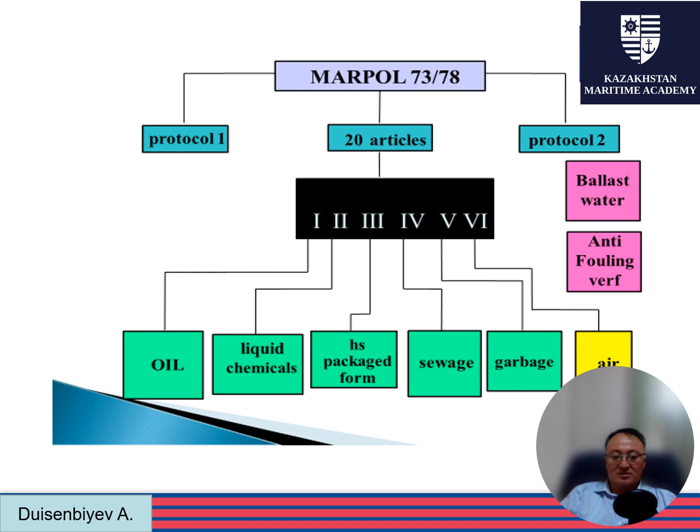This is a reminder of the structure of the Marpol Convention, where you can find 6 annexes: oil pollution prevention, liquid chemicals, hazardous substances packaged in packaged form, sewage pollution, garbage pollution, and finally the currently last annex of Marpol, which is air pollution prevention.

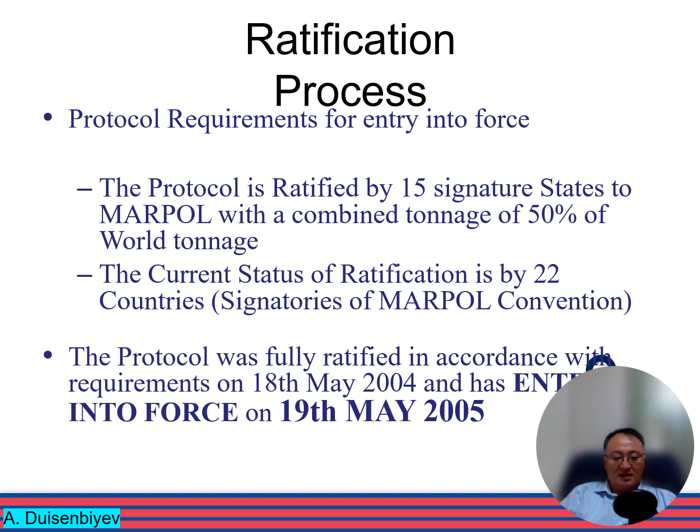The protocol of Marpol Annex VI entered into force in May 2005. It took a lot of discussions, several years to come to this annex, but finally on the 19th of May 2005 the protocol entered into force. Flag states party to the protocol.

There are enough countries with enough world maritime vessel tonnage. When these 22 countries signed for this protocol, it entered into force.

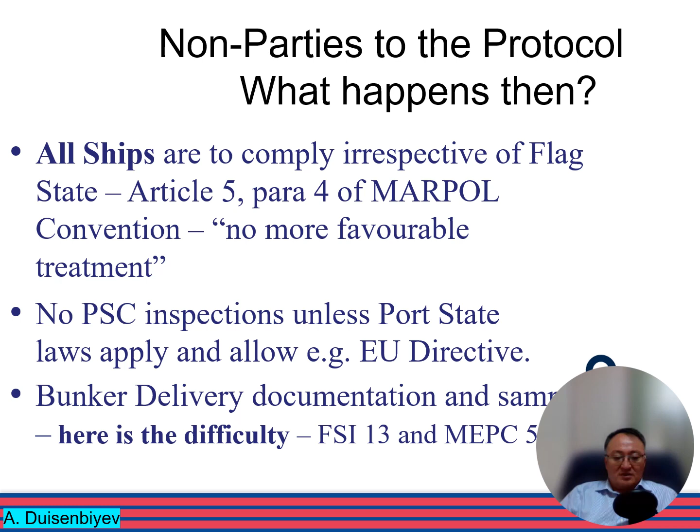Why do we need to take care about air pollution prevention? Because the effect of the world maritime industry became important to prevent air pollution. Emission gases from ships include several different types.

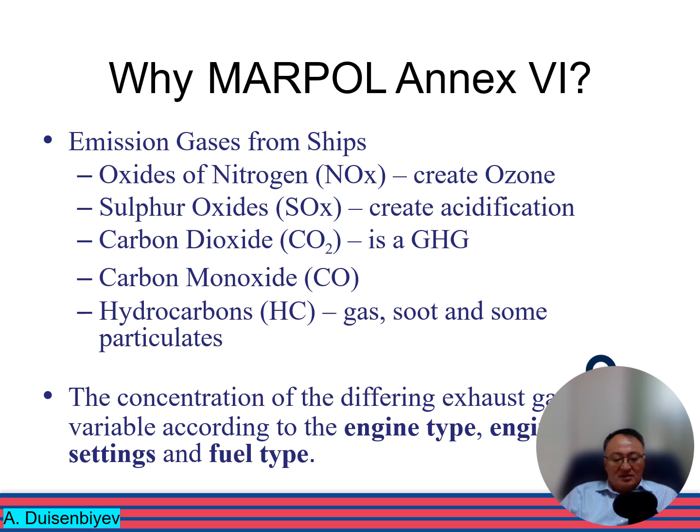Oxides of nitrogen create ozone depletion in the air. Sulfur oxides create acidification. Carbon dioxide is a greenhouse gas. There's also carbon monoxide, hydrocarbons, gas, soot, and some particulates. The concentration of the different exhaust gases is variable according to the engine type, engine settings, and fuel type.

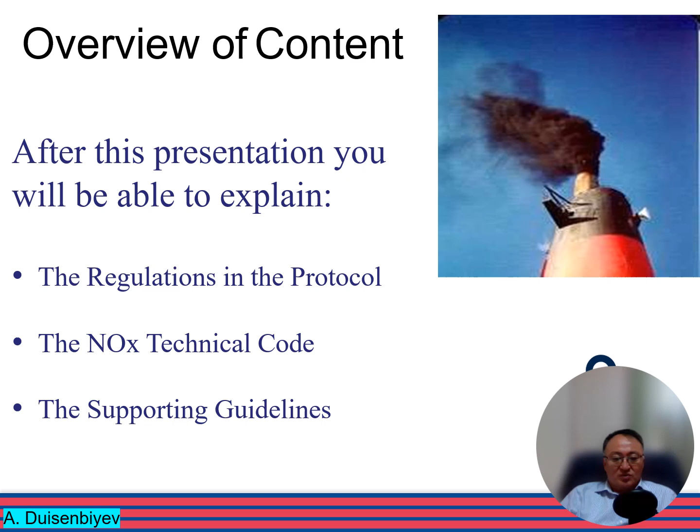So we are producing these black smokes. After this presentation, you will be able to explain the regulations of this protocol, the NOx technical code, the supporting guidelines, and how it is important to keep our air clear.

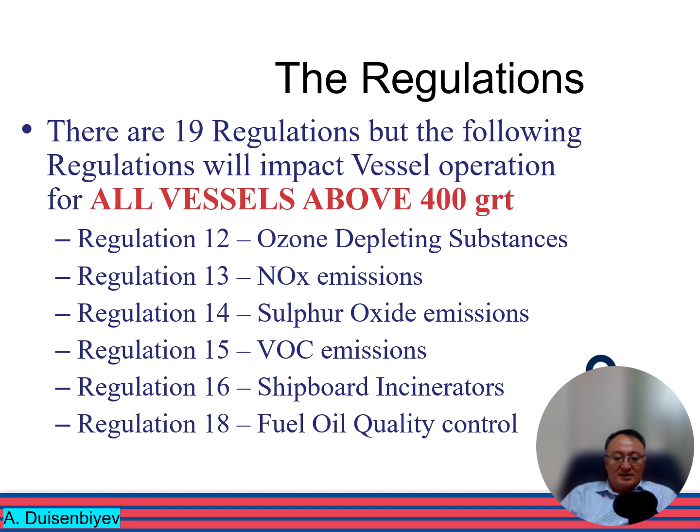There are 19 regulations, but regulations 12 to 18 are very important in accordance with the application to all vessels above 400 gross tonnage.

Ozone depleting substances, ODS - deliberate emissions of ozone depleting substances are prohibited. New installations can only use HCFCs, hydrochlorofluorocarbons, until 2020. These substances, when removed from ships, must be delivered to reception facilities.

Where can you find these HFCs? Of course, our different home appliances can also produce it, like air conditioning systems, our fridges and so on. They are all using HFCs.

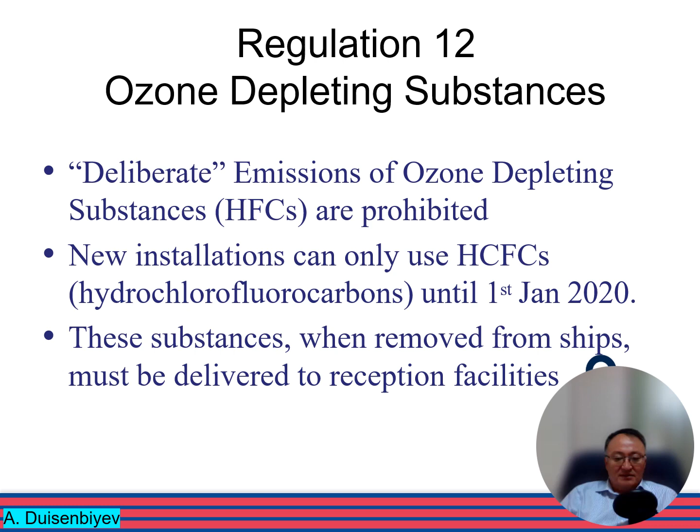For all engines except emergency engines, please pay attention. Emergency engines are used in safety boats, life-saving appliances, and so on, which are used in emergency conditions. For all engines installed on ships after 1st January 2000 of more than 130 kilowatts, they must comply with these regulations. This is very important that you have to know the system of application.

The NOx emission is limited to 17 grams per kilowatt hour for engines operating at 130 RPM, rotations per minute, but reducing to 9.8 grams per kilowatt for 2000 RPM.

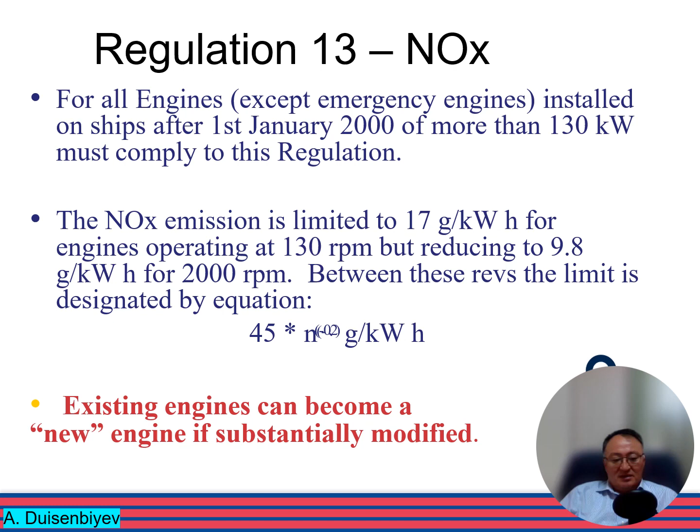Existing engines can become a new engine if substantially modified, for instance after some repair. Regulation 13 requirements are fully defined by the NOx technical code, which is recommended technical reading.

Certification of the engine is done at manufacture and checked on installation for settings. A certificate is required for ships under Annex VI - the Engine International Air Pollution Prevention Certificate and the International Air Pollution Prevention Certificate are required.

PSC inspection for the engine by the parameter check method - this is a technical method, and port state control officers are able to provide this check. The simplified measurement method is another option which the vessel can go through because of previous positive results.

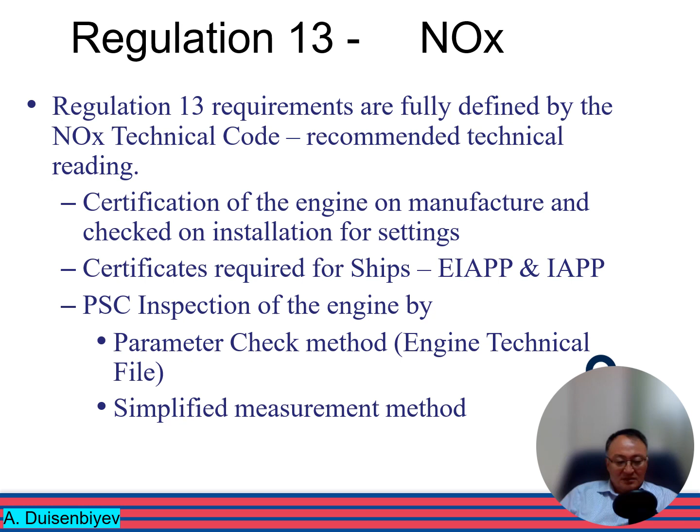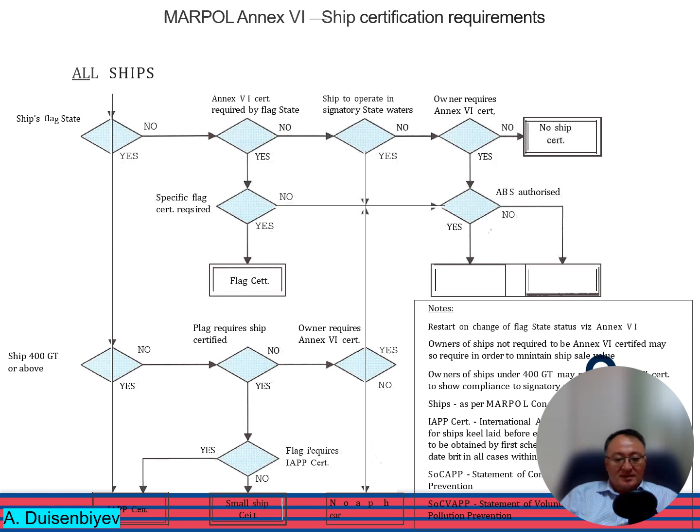Here you see the ship certification requirements - this is a logical scheme: yes, yes, no, yes, no, yes, no. So you can see the way the vessel can obtain the certificate, and in which case it can get no certification. Please try to stop on this table and understand the process of certification.

Regulation 14 is applicable to the prevention of sulfur oxide pollution. The worldwide sulfur cap on fuel oil is set at 4.5%. Sulfur Emission Control Area.

This is new stuff which is created by IMO in this Marpol Convention - these are SECA areas, Sulfur Emission Control Areas. Areas under this annex are the Baltic Sea, North Sea, and English Channel. Currently, we have these SECAs.

So sulfur level of fuel is 1.5%, or alternatively use an exhaust gas cleaning system. So what does it mean? The vessel which is entering English Channel, Baltic Sea or North Sea should switch from heavy fuel oil to marine diesel oil, from HFO to MDO, or it should prove that it has an exhaust gas cleaning system on board of the vessel.

Regulations for the first SECA came into force on the 19th of May 2006. So you need to understand and use this knowledge in the practical stuff.

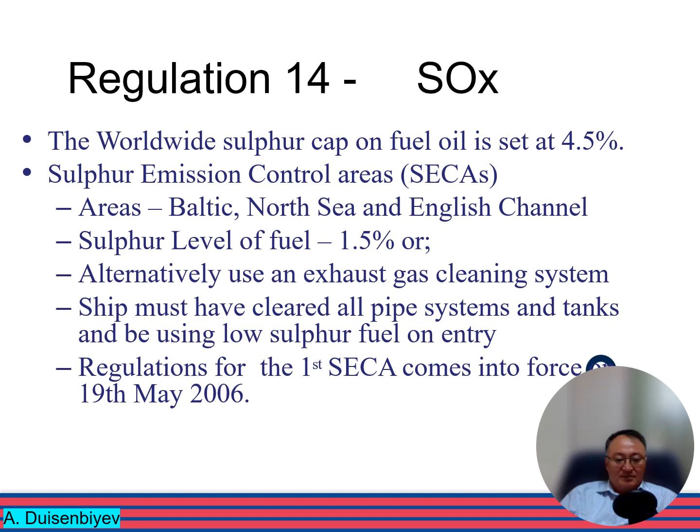Shipboard procedures for SECAs: we need to have a plan in advance for entry, and enter the commencement date of preparation in the logbook together with bunker type quantities on board. So logbook entry, when entry requirements are met, and entry into SECA - remember latitude and longitude, date and time, together with bunker figures for each tank.

How it looks in reality: you have to have a plan. The captain, the chief officer, chief engineer - they have to have a plan how they are planning to enter the SECA area. So they put the date and time in the logbook, and they put the latitude and longitude where they believe that they entered the SECA. And also they have to count the amount of oil they consume during being in the SECA area.

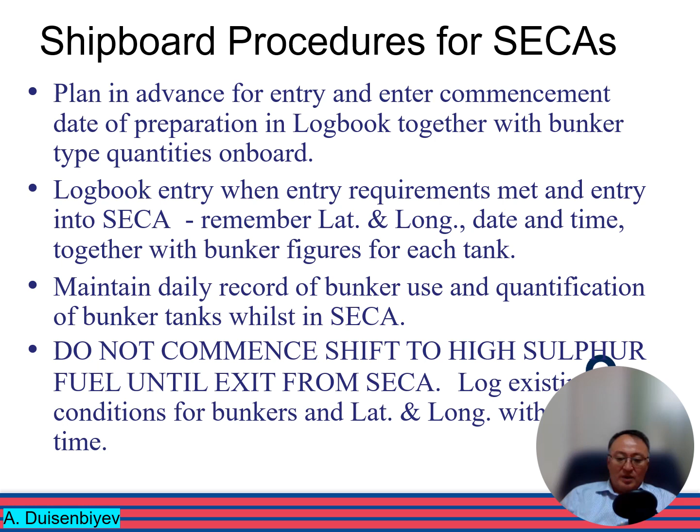So maintain daily record of bunker use and quantification of bunker tanks whilst in SECA. Do not commence shift to high sulfur fuel until exit from SECA. During all the time you are in the SECA area, you have to continue to use marine diesel oil. Log existing conditions for bunkers and latitude, longitude, with date and time when you get out from the SECA area.

So VOCs, volatile organic compounds. Subject to individual terminal regulations, tankers may have to be equipped with a vapor return manifold. Notification of VOC control by a port to the IMO shall be 6 months before enforcement. Tankers can accept... tankers up to 3 years after the date of VOC control enforcement by the terminal.

The standard for the design of VOC return, and operation, is contained in Maritime Safety Committee Circular 585. So vapor return manifold is some extra equipment which will prevent the volatile organic compounds emission to the air.

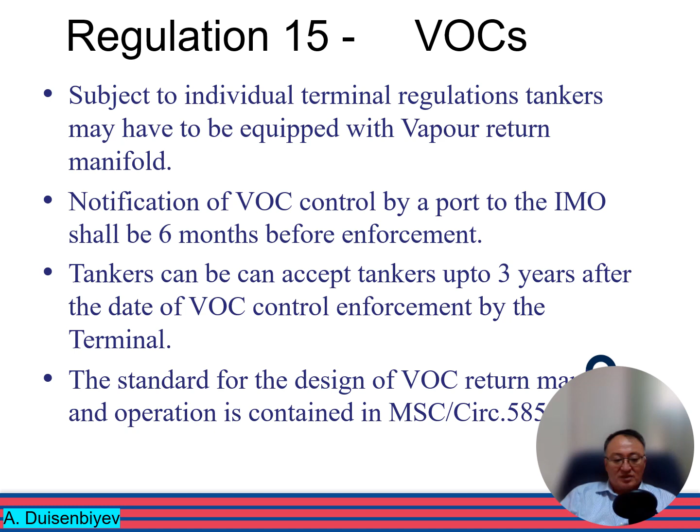Regulation 16, yes, it's related to the incinerator. Incinerators installed after 2000 must meet regulations and must certify to meet the specification of resolution MEPC 76, Appendix 4 of Annex 6. Each incinerator must have a manufacturer's operational manual. Crew responsible for incinerator operation shall be trained and follow the operation manual. So incinerators should be certified and they have to have a manufacturer's operation manual.

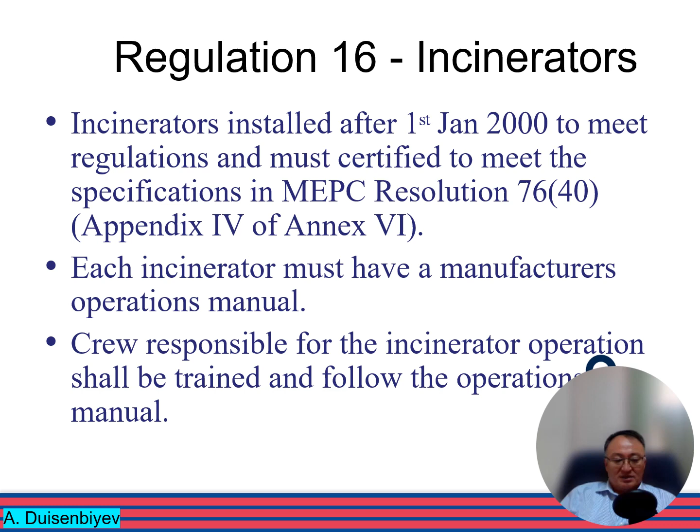So how to use an incinerator? The following substances are prohibited from incineration: stuff out of Annex 1, 2, and 3 cargo residues and related packing materials. What does it mean? No oil residues can be put in the incinerator.

Noxious substances, yes, some dangerous substances - so even the packages of these materials cannot be incinerated. PCB, this is plastic stuff. So garbage as defined by Annex 5 containing heavy metals in content. So petroleum products containing halogens are also prohibited from the incinerator.

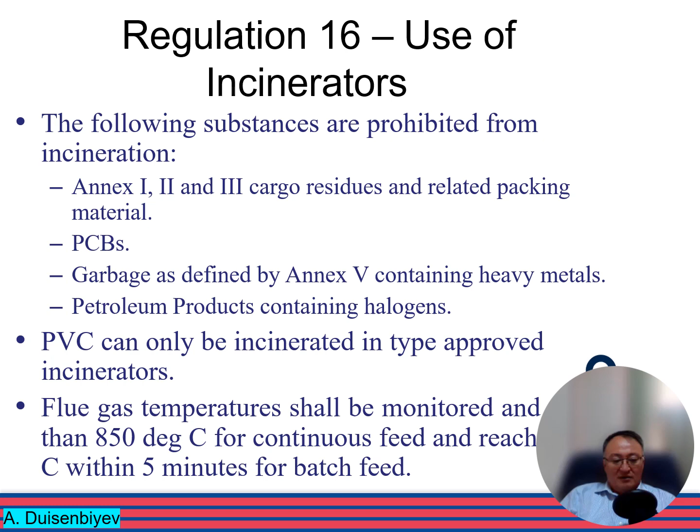PVC can only be incinerated in type-approved incinerators. This means you have to have on board a specific, very special incinerator which is approved to use for the PVC. Flue gas temperatures shall be monitored and be not less than 850 degrees Celsius for continuous feed, and reach 850 degrees within 5 minutes for batch feed. So this is a very special requirement related to the incinerator - how fast, how high the temperature will be in the incinerator to fire, to burn the stuff inside.

Regulation 18, fuel oil quality - this is very important in terms of documentation. Fuel oil shall be blends of hydrocarbons derived from petroleum refining. Fuel oil shall be free from inorganic acids. Fuel oil shall not include any added substance or chemical waste which either jeopardizes the safety of ships or adversely affects the performance of the machinery, or is harmful to personnel, or contributes overall to additional air pollution. This is very important to remember, that oil quality should comply with these regulations.

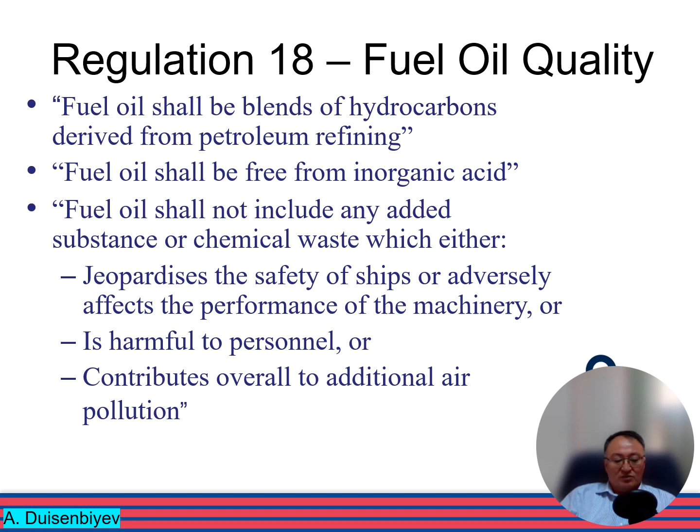So bunker delivery note, BDN - this is a very specific document, and it becomes a statutory document on every vessel. Must be kept on board for 3 years for inspection, and a copy may be taken for further examination by port state control. So you need to be responsible for this document for at least 3 years.

Must contain all data required by Appendix V, like name and IMO number of vessel, the port where you get this fuel, date of commencement of delivery, details of fuel oil supplier, product name, quantity, density at 15 degrees Celsius, and sulfur content in percentage. So a declaration that fuel supplied meets regulation 14 and 18 requirements.

Please remember, this document is important, and it will keep you out of any punishment from port state control. So your oil supplier should be certified, and the oil content should be approved by the documentation. You keep this BDN on board the vessel for 3 years.

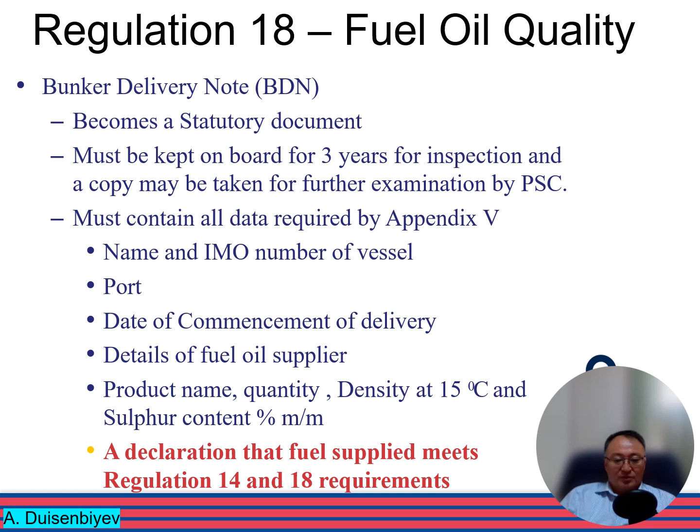Not only document in form of paper, but also on board the vessel you have to keep fuel oil sampling - a sample of this oil. When you charge your vessel with oil in some certain port, not the first or the last, but in the middle of the operation, you have to take a sample of the oil, seal it, and it has to be supplied to the ship by the bunker supplier.

These samples should be kept on board the vessel. For each individual BDN, a sample has to be taken at the vessel's bunker receiving manifold. See procedure in associated guidelines, the international safety management manuals. The sample label has to be signed by both the bunker supplier's representative and the vessel's chief engineer.

The sample size shall be not less than 400 milliliters. The sample is not to be used for any commercial purpose - you keep it for your own kind of safety. The sample is to be retained on board for at least 1 year for inspection by port state control as required. So the BDN you keep for 3 years, and the sample can be kept for 1 year.

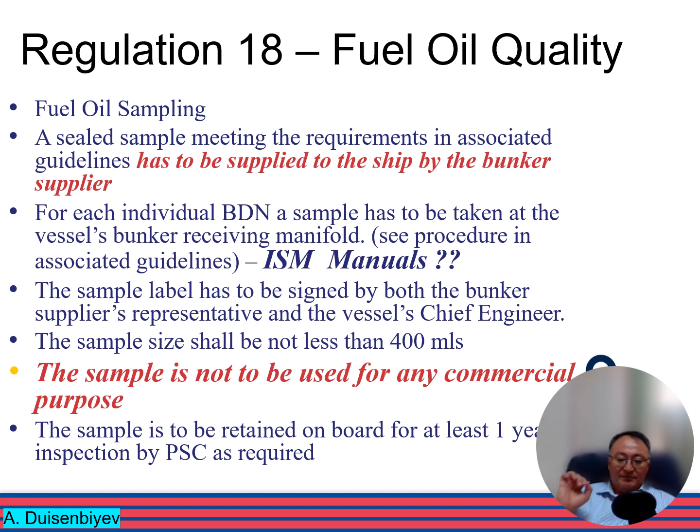Shipboard procedures for BDN and samples: adequate bunker manifold location for sampler attachment, external safe storage location for samples for the 1 year period - it should be some special box, I think. Logbook for sample retention and custody transfer. Safe storage for BDNs and other documentation relating to bunkering on board. Again, this is on one side a BDN in form of a paper document, and the sample you keep for 1 year.

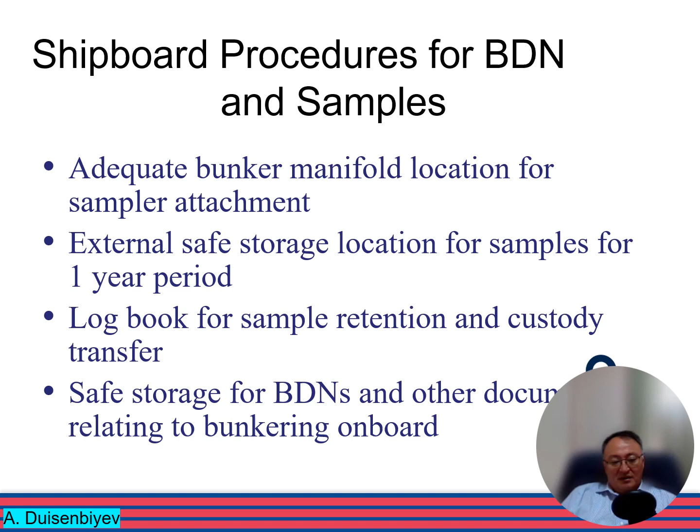This is operational requirements, the instruments for control, and the technical progress doesn't stop all the way. We know that the technical changes are making our industry cleaner and cleaner. So how to reduce emissions of nitrogen oxide?

So we have several techniques: humidification, water injection in the charged air system, water fuel emulsion, fuel quality, and switch to natural gas - natural gas is a zero emission fuel. So, optimization of the combustion process.

This is technical adjustment of the engines: injection timing retard, injection rate profile tuning, compression ratio - the higher the ratio of compression, the less emission - charge air temperature and pressure, exhaust gas recirculation, direct water injection, selective catalytic reduction, and engine modification.

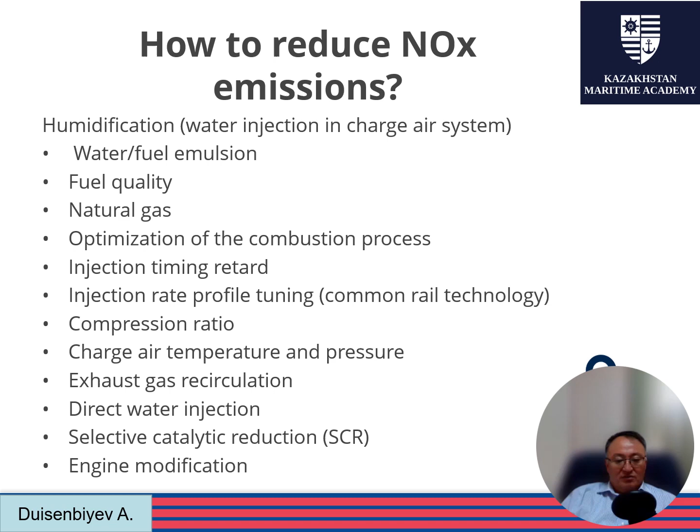So all of them can be used separately or in combination of different ways.

Port state control, flag state control guidelines - the guidelines in different countries are different, and the common base for the guideline is MEPC resolution 53. Here you see it: initial inspection and primary survey parameters and clear grounds for in-depth inspection, in-depth inspection parameters, detainable deficiencies, non-party ship inspections. All these aspects are for the port state control.

So the inspectors, they can proceed - the vessels can proceed through the inspection in different ways, in-depth or clear grounds like this. It depends on the background of this vessel.

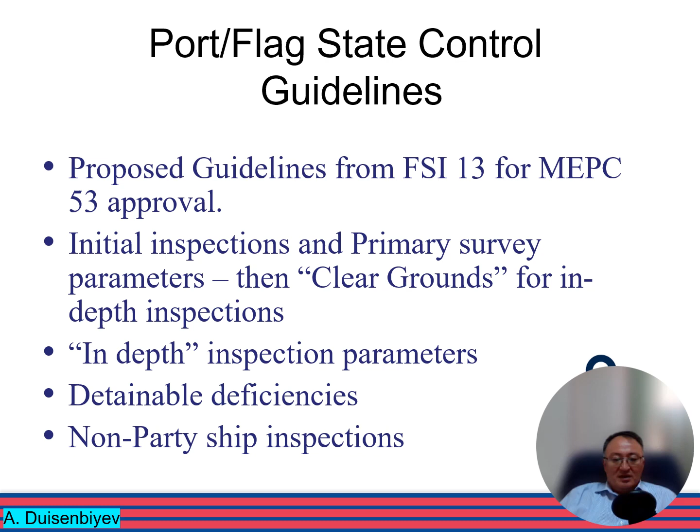Not only Marpol, but also other regional regulations are taking care about the prevention of air pollution. In the United States of America, they have regulations applicable to United States flagged ships, and also in the California area - the California Air Resources Board is also increasing the local or regional regulations.

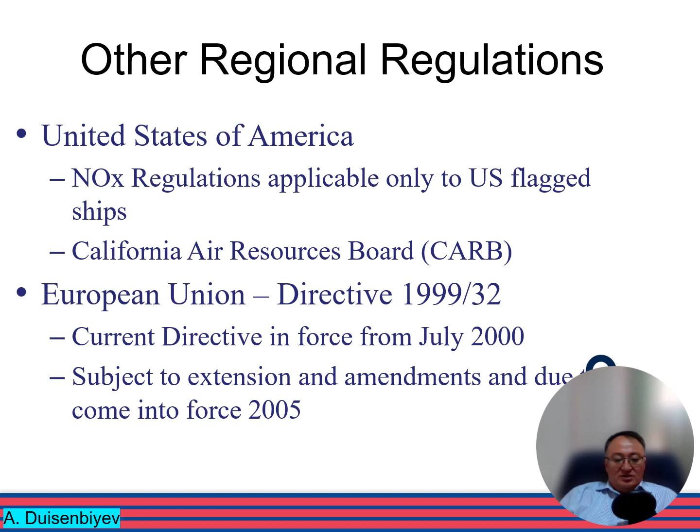In the European Union, there is a directive - the current directive in force from July 2000, subject to extension and amendments, and due to come into force in 2005.

Due to the introduction of new engine technology, for example HAM, pressure for further reduction in NOx emissions is going on right now. International and regional pressure for further reduction in sulfur emission control emissions, introduction of particulate emission control, and further considerations for VOC control.

As you see, there are a lot of instruments in our hands to reduce the emission to the air. We have several techniques, so we can implement new technologies, and all of them are just appointed to one goal: to reduce the emission to the air of different gases.